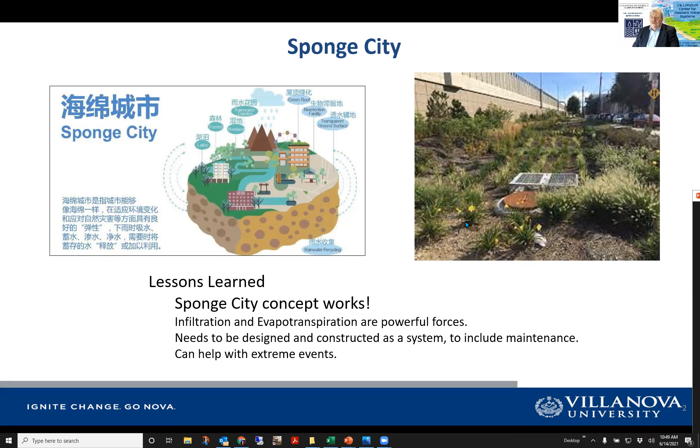And also we're finding it can really help with extreme events. A lot of the time in the United States, they think this doesn't help when a large storm hits, but it can. Just to give you a little framework, we're in Philadelphia on the East Coast of the United States. We get about twice the rain that you get in Tianjin, about 1,200 millimeters. Ours is spread out more during the year, and yours looks a little more focused in July and August as your wet and rainy season. So bear that in mind as we talk about our projects; there are differences in our climate, just as there would be if I was talking to somebody from San Francisco.

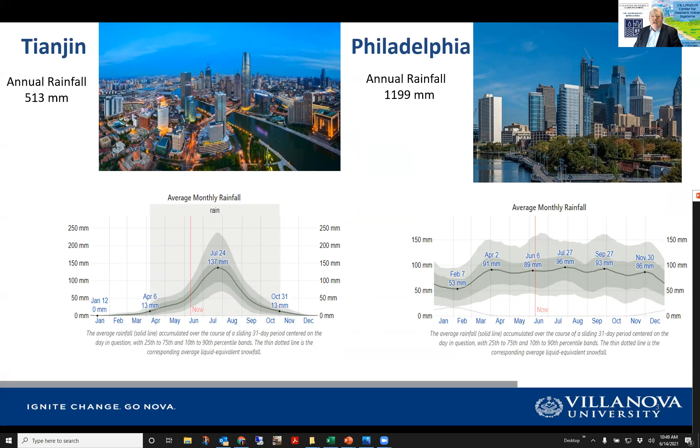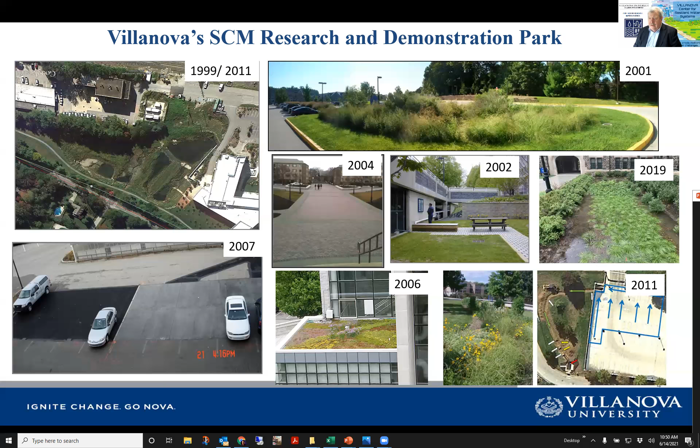Our lessons are based upon our research and demonstration park. We've been looking at stormwater and green infrastructure for over 20 years. Our wetland in the upper left, we first started building in 1999, last century, I guess I should say. The rain garden in the upper right, which we'll talk about later, is now 20 years old. And all these systems are operational. The new one on the right that says 2019 is a brand new dorm complex where our university built rain gardens as part of that process.

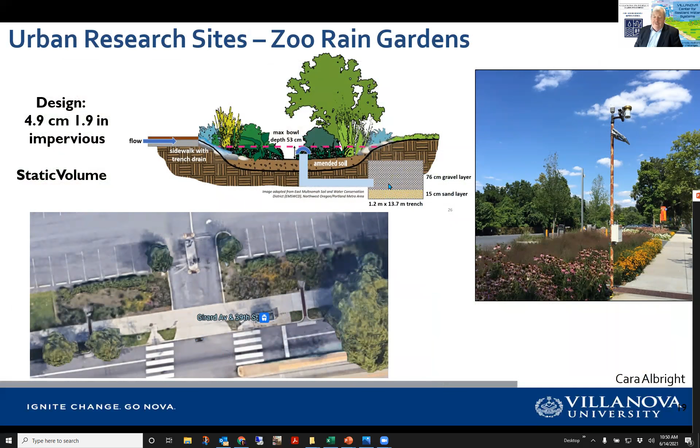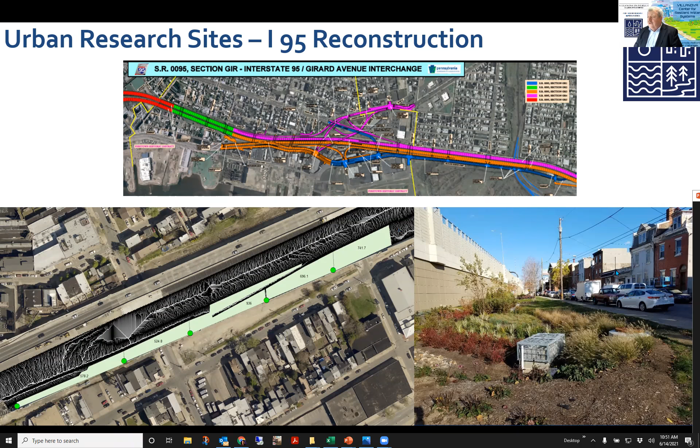We are also doing sites inside Philadelphia. Here's what we call the zoo rain gardens, because it's next to the zoo, and you can see these two rain gardens are next to busy Girard Avenue. It's a little different design. We have a rock bed to the side, because of hitting utilities underneath, and they had to move the rock bed. We'll talk about it later. We're also doing work with the transportation department, rebuilding the interstate highway system through Philadelphia, where they're building green infrastructure along the way in this 1700s city block. So now the residents have a little green space in front of their houses.

So what we've learned: to design, we need to consider our climate, our soil properties, and our vegetation. Looking at your rainfall patterns, I'd worry about keeping the plants alive in some of the dry seasons. The configuration of the SCM, what we call a stormwater control measure, a rain garden or infiltration device, is important because it has to be based upon what we just talked about. The runoff capture, how the water gets there, has been more of a problem than we ever expected. Construction: most of our failures are due to construction. If we don't build it right, it's a problem. And maintenance and longevity is a design component we have to consider.

Here's a picture from the 1990s of a rain garden. Here's a little more current.

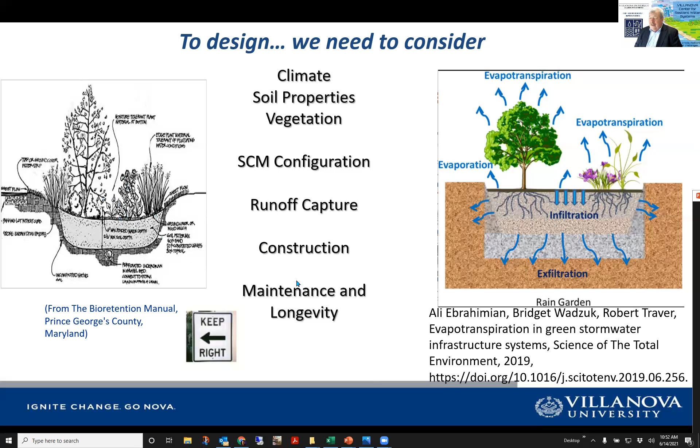This little keep right sign is a bit of a joke. I don't know if that's a real sign or not, but it looked funny.

So what we've learned about the evolution of infiltration: we now know more about soil physics in stormwater. We know about the vadose, the unsaturated zone, the effect of soil suction and temperature on infiltration, and the importance of plant available moisture to keep the plants alive so they can build more roots and create pathways to maintain infiltration over the life of a project. For performance, we now expect some reduction in extreme events. And infiltration is no longer just a plant science. It's really an engineering science.

So we bring the plant folks, the landscape architects, the geotechnical engineers and the water engineers all together. And in the US, we still have a disconnect between science and practice. A lot of our regulations and design processes are 20 years old. We're not taking advantage of these things. So don't do what we do as you move forward.

Now we're also learning more about the evolution of evapotranspiration. We realize how important a part of it is of green infrastructure, of sponge city systems, water balance. And we find that evapotranspiration really removes the stored water volume to prepare it for the next storm, and that can add reduction. And again, maintaining healthy plant life is so important for maintaining these structures over time. And again, the role of evapotranspiration is supported by science. And again, we still have that same disconnect.

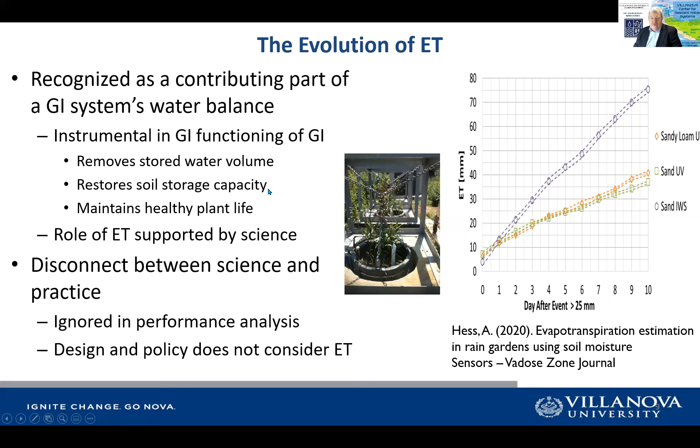And what we found out on these experiments about infiltration and evapotranspiration is you have 10 days, almost no matter what the soil type, it's going to be gone. It's either going to be gone through infiltration or through evapotranspiration. Poor infiltration soils get rid of more by evapotranspiration. Higher infiltration soils have more infiltration and less evapotranspiration. That's important to understand in the design, and also considering the infiltration rate of the in situ soils. That becomes very important as we move forward.

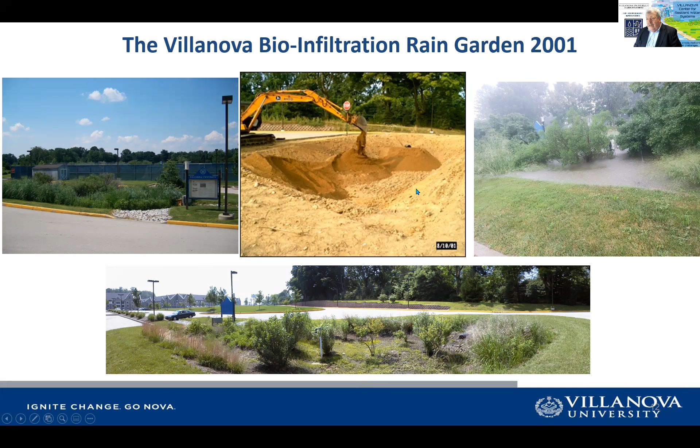So, I'll tell you one story about a site I've talked about in both my previous 2 visits to China. This is a rain garden we built in 2001. We dug it out, mixed soil and media together, and planted it in 2001. And from that period of time, we are getting different recession rates of the water going into the ground after a rainstorm event. But it's consistent, and we're getting good performance over the whole period of time, and the performance does not look like it's dropped at all.

However, what struck us is we have a lot of events where we have a lot of volume coming in and the amount leaving is low, much lower than you would expect if I just compared the volume of the storage available. So that clearly told us that we are getting volume infiltration during storm events for these particular storms.

And then we had what we call a 200-year, 12-hour storm, Hurricane Isaias. And we had a lot of overflow, but we got rid of a good punch of a 200-year, 12-hour storm. I apologize for the units. So this got rid of a lot of volume, much more than you would expect from a simple rain garden. So it does help in removing the flows from extreme events as well.

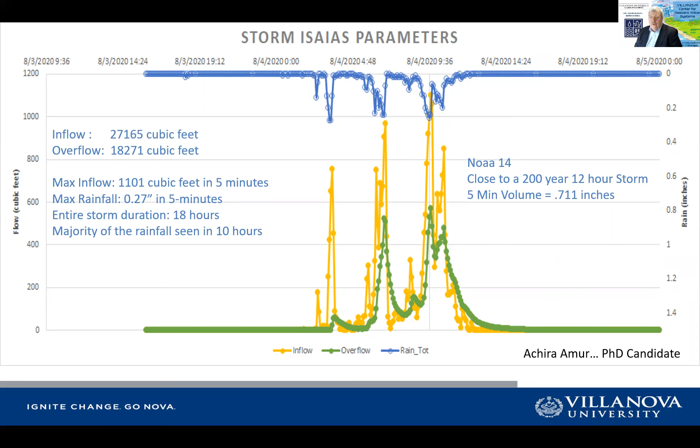And the other thing that we found for something like Hurricane Isaias, which is very remarkable, is how fast it was able to empty. It took less than 2 days to empty this site after all that rainfall volume. So then it was ready for the next storm event. That to us is remarkable and a good example of how powerful infiltration is and why we need to consider it as part of reduction for extreme events as well.

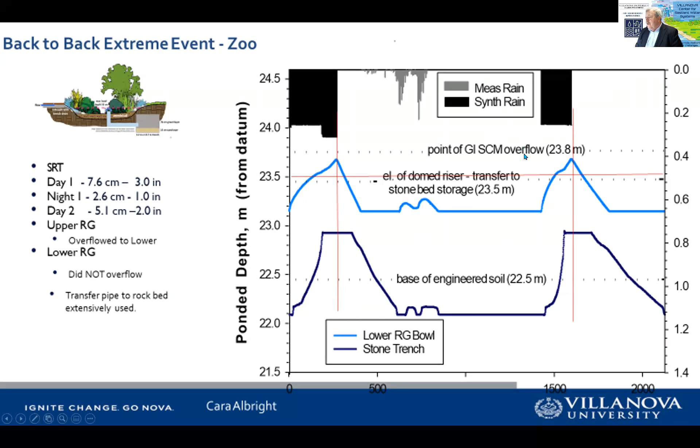So, practical lessons in design, and this is, I believe, Xi'an. I took the picture visiting one of your sites, and we think alike. We have the percent removals based upon volume, sizes, and storms. So, practical lessons in design: first, get the water to it. I don't know how many rain gardens I've found that are built upstream, and water doesn't flow uphill. We found that design using continuous simulation is much better than design storms. The design storms over-exaggerate the intensity at the center compared to what we really see. And because of that, they're not really designed right with the ratio of the volume or the infiltration capacities.

Designing the soil so there's enough silts so we can get some vegetation to maintain infiltration pathways, and capturing sediment and trash, we'll talk about in a second. On the configuration of the SCM, do not compact. I don't know how many we found that have failed because of compaction during construction. We are now starting to recommend, if it's designed for 25 millimeters, when it's full, you want to bypass the flows and not run them through it, causing damage and erosion, because that's going to shorten the lifespan of my SCM.

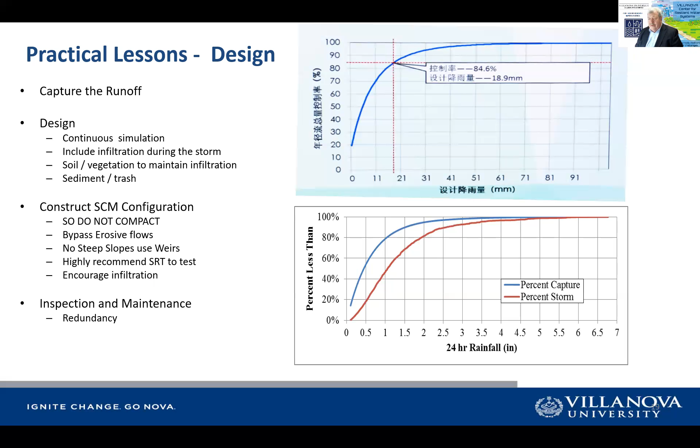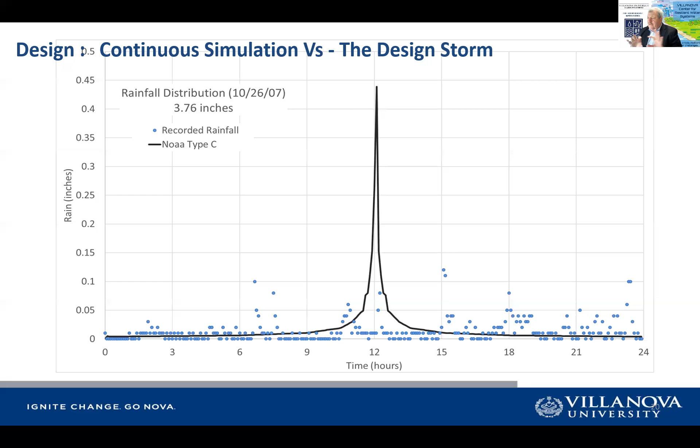So here's what I mean about the design storm versus continuous simulation. The blue dots are actual rainfall records of a 3.76 inch rainfall. You can do the math, times 25, that's a lot, about 100 millimeters of water. If it's a design storm using the US standards, a type 2 storm or whatever, we would have a peak about 4 times greater than we evidenced during the storm. And we see this over and over again. So if you're designing green infrastructure for a design storm, you're designing for that peak. If you're designing for what really happens, you're designing for the whole infiltration capacity of the storm event.

And so one of the ways I look at it is, if my rainfall intensity is higher than my exfiltration, I'm going to need some ponding for a lot of storms for that water to be captured and infiltrated. If it's a very high intensity and more than I can possibly hold in a pond, I'm going to need a separate facility for flood control. If it's a low intensity, there should be no problem managing this without having a gargantuan storage area above it.

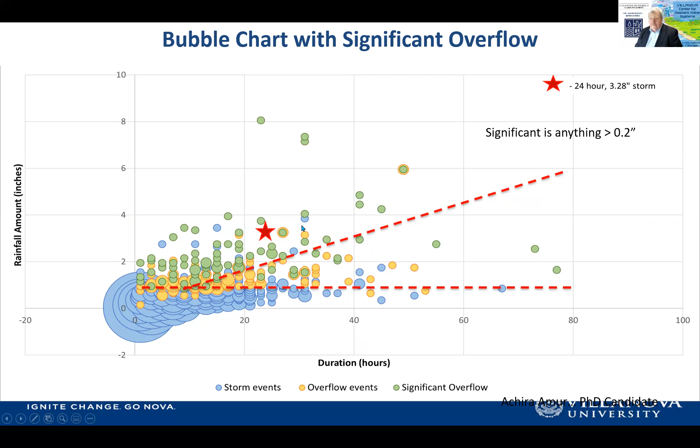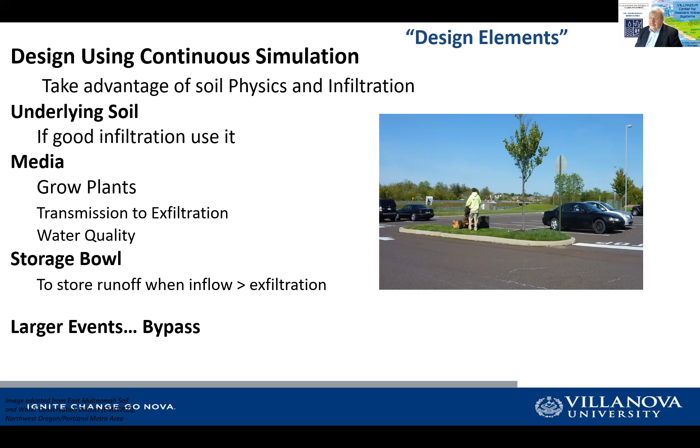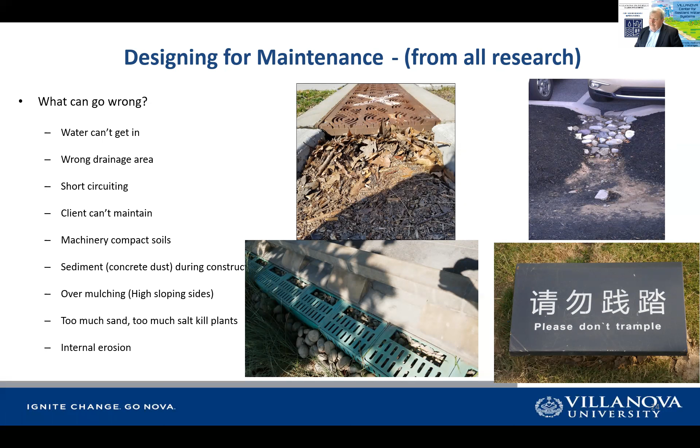I like this basic design that you have for capturing trash. I think it's a great design. If anybody can tell me who manufactures this, I'd like to know. And on the right, I just like that sign. We call it trampling as well. Trampling during maintenance can reduce your infiltration.

We know what will infiltrate, what increases infiltration, what decreases infiltration. Very important aspects of it. And if you have a chance, look at this paper by Ali Ebrahimian and a few others, to include myself. We know maintenance, traffic, and most of these are actually related to construction, most of the things that reduce saturated hydraulic conductivity. What increases it is to the right.

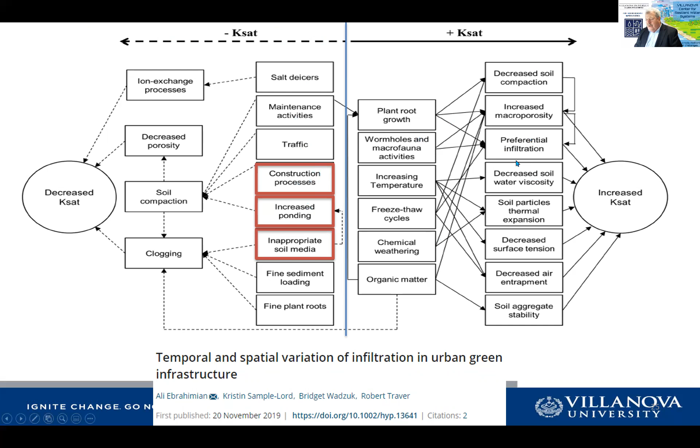Now, at Villanova, I'm going to conclude here with 2 underperforming SCMs, or Sponge City sites. And what we found is there are 2 very different ones. The one on the right, there's a limiting layer. By filling it up with water from the hydrants, it did not infiltrate. By doing that inspection, all we had to do is punch a few holes through that limiting layer. Works fine today.

The one on the left was caused by construction. Very high, a lot of mulch; it all came down and compressed. We are removing that mulch because everything else underneath is okay, and hopefully that'll be in operation. So we do recommend doing a little forensic investigation. Don't spend all your money trying to rebuild it. You may not have to.

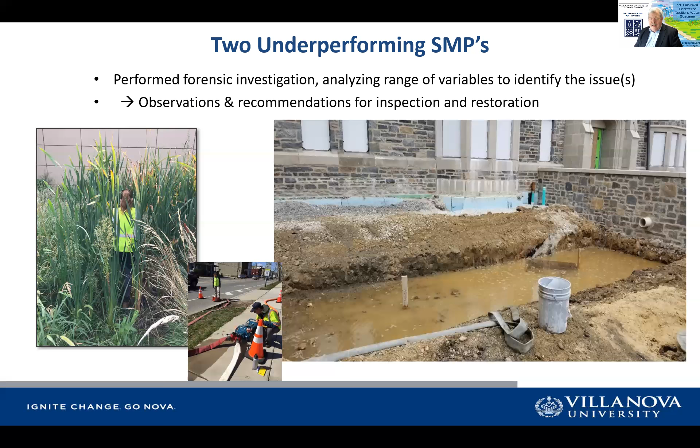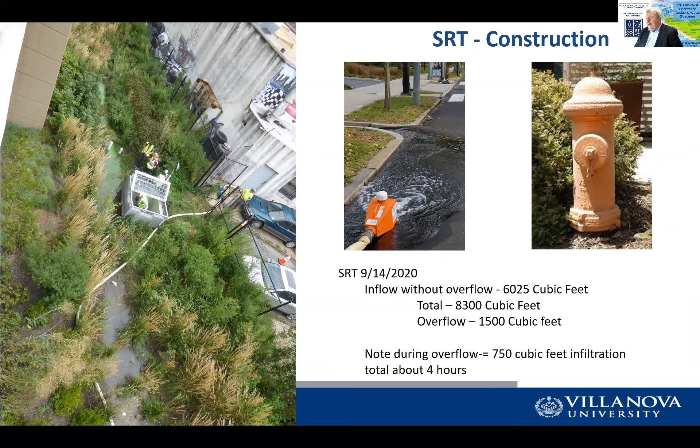All right. And then finally, here's another SRT construction test. By filling up this site from fire hydrants, we're actually able to find construction errors, elevations that were wrong. So I really recommend that as a practice. So what have we learned? Infiltration, when you design it, construct it, maintain it, is robust. You can depend upon it.

Evapotranspiration is powerful. It really depends on making sure the vegetation is happy. If your vegetation is happy, you probably have a well-working green Sponge City project. Maintenance is a design element. Trying to get the trash to concentrate, trying to avoid erosion within the system, creating some low flow areas where maybe you can get rid of sediment, all are part of your design.

And erosion during extreme events can be worse than any sediment coming off the sites. And oversizing is not always effective. If the water can't get there, it doesn't matter how big you build it. And this is a public relations part. People do not want rain gardens. And it's kind of amusing, because all that vegetation doesn't look like a very well-maintained yard.